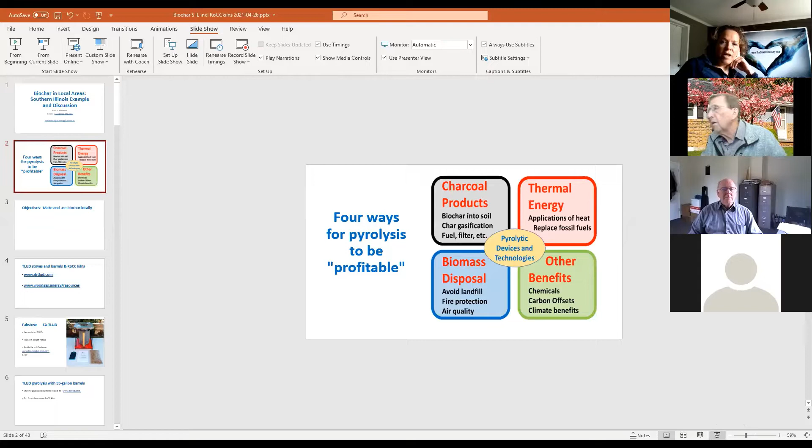Slideshow, we can see your '4 Ways to Make Pyrolysis Profitable.' Yeah, and that, okay, I'm on slide 2. That's all right, I got my controllers over here. All right, and it's filling the whole screen, correct? Yep. All right, fine.

Tentative title, as we said, this is very casual. I met Amy, what year was it, Amy, you had your conference? Well, it was 2019 in Carbondale, June 2019. June 2019, gee, it seems like longer ago than that because of COVID. But I went to Carbondale and got very enthused about the different types of things. I explained some of the stuff I was doing there. Lots of things have changed since then, so this is certainly no repetition of what I've done in the past here. There's my email address. I'll give that to you later on if you need it.

The 4 possible ways to make pyrolysis profitable. One, obviously, charcoal products - this is the biochar, but if it's the char only, it probably isn't going to make enough money to be sustainable. We'd like to use the energy, mainly thermal energy, not trying to talk about electricity all the time, which is the big buzzword. Everyone wants to do electricity, but just the thermal energy has great value.

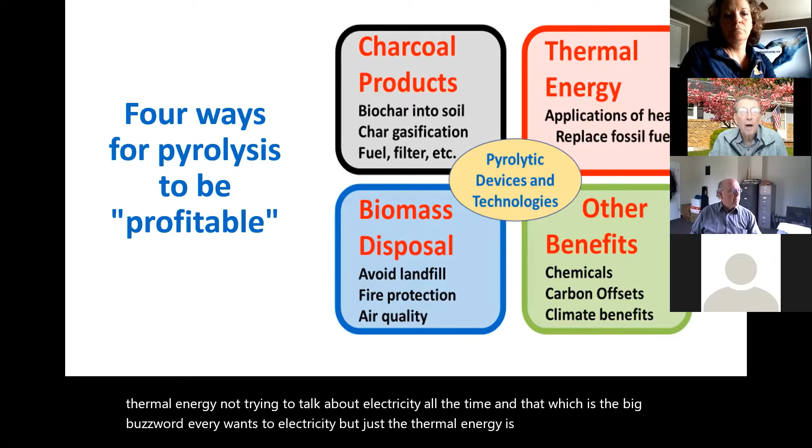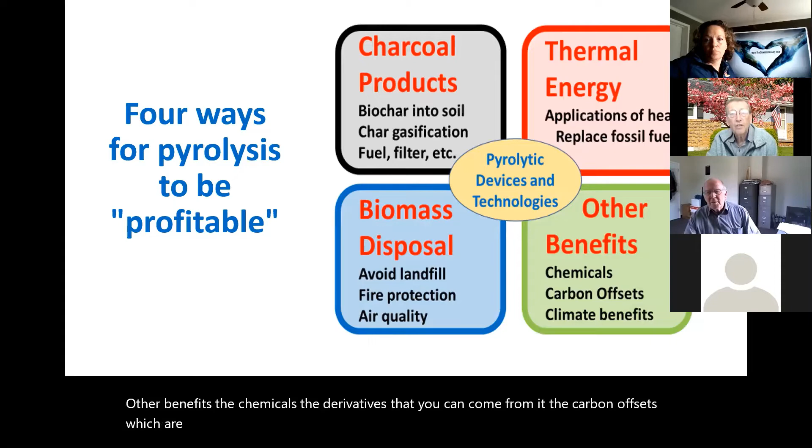Biomass disposal - out in California, they've got to get rid of the underbrush, but we've got landfill issues, air quality issues, how to do it cleanly. And the other benefits: the chemicals, the derivatives you can get from it, the carbon offsets which are marketable, and of course the climate benefits - we want to help the climate. That's actually different from the carbon offsets or carbon removal issues. So that's how I usually start off things, to put things into perspective.

We want to get 1, 2, 3, or all 4 of these working together to make something sustainable. This slide simply says objectives: to make and use biochar locally.

Amy's the driving force for Southern Illinois, and I'm about a 4-hour drive away. And actually, Joyce, you're only an hour away from me, and we'll talk about stuff. We'll probably meet fairly soon. I hope so.

One of the objectives here is whether there's going to be a nucleus, a focal group, activity centers, something in Southern Illinois, or virtually in Illinois itself. The Illinois Biochar Group exists, it functions. COVID has put the dampers on it, but I am one of the two guys that founded it, and we've had meetings in the past and look to have them again in the future. So if I can help out in the biochar way, please let me know.

I give here 2 websites. My one website is Dr. TLUD, D-R-T-L-U-D, drtlud.com. I didn't invent it, but I did name it. And this is the technology of a migratory pyrolytic front going down through the biomass.

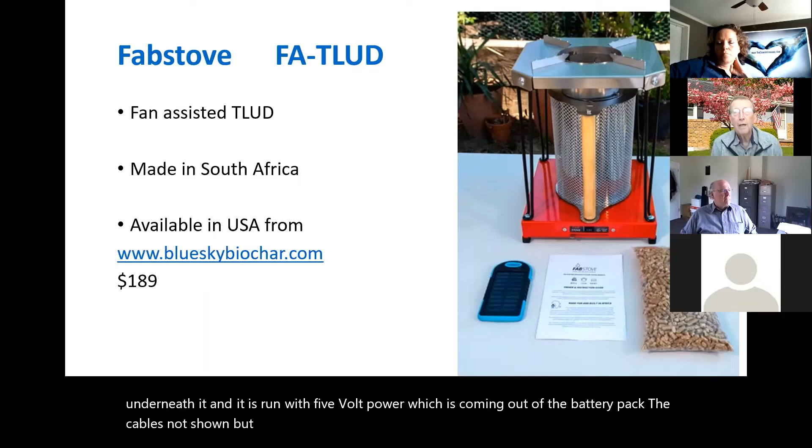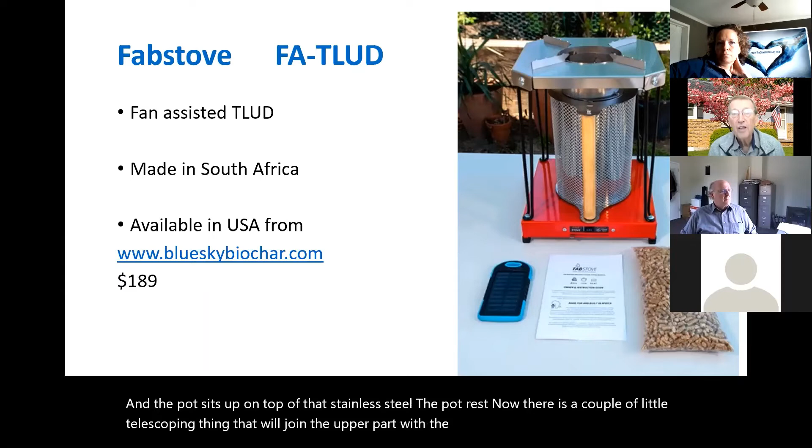In this stove, the red base has a fan underneath it, run with 5-volt power coming out of the battery pack. The cable's not shown, but it plugs in with a USB, same as for running cell phones. The pot sits up on top of the stainless steel pot rest. There's a coupler, a little telescoping thing that joins the upper part with the gasifier in the center, the silver one. It's a mesh outside, has a wooden handle, and it burns pellets inside of that.

Extremely clean - I could go on a lot about this - and it will produce very good biochar out of the pellets at a typical rate of about 20% yield. Put a kilo in and you get 200 grams out. And you can cook with it for about an hour and those types of things.

If there's interest in this as a way to make biochar, very small scale, that's fine. We can talk about it, maybe some group in Southern Illinois and all that.

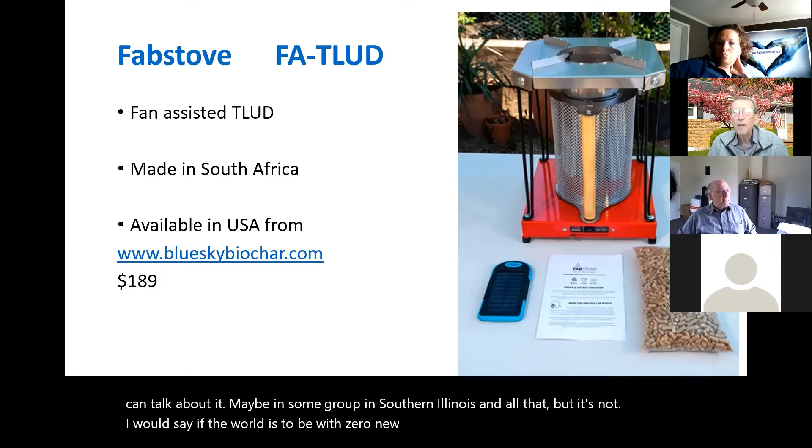If the world is to be at zero new carbon emissions by 2050, all the people that are cooking will be cooking with either biomass or electricity. There'll be some solar, but not at night. But gas, kerosene, and coal cooking will all be out. So when you can have basically a gas-burning stove that makes its own gases out of biomass, and it's very clean, this is something which we would want to have.

You use 1 watt of energy for the fan to get 1,000 watts of thermal power out of it. So it's a great device.

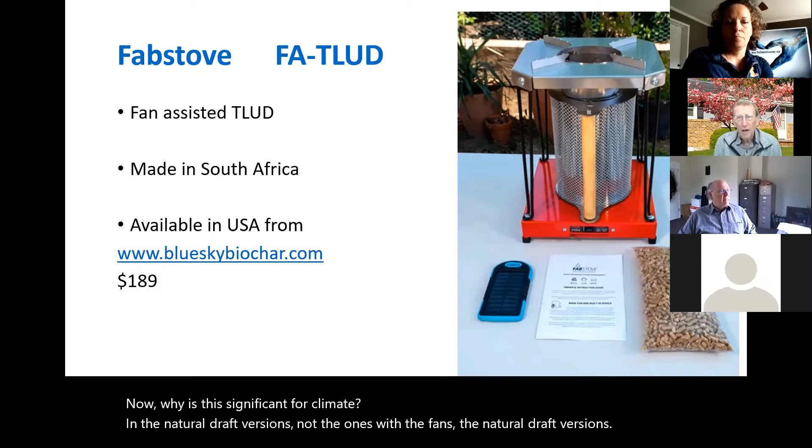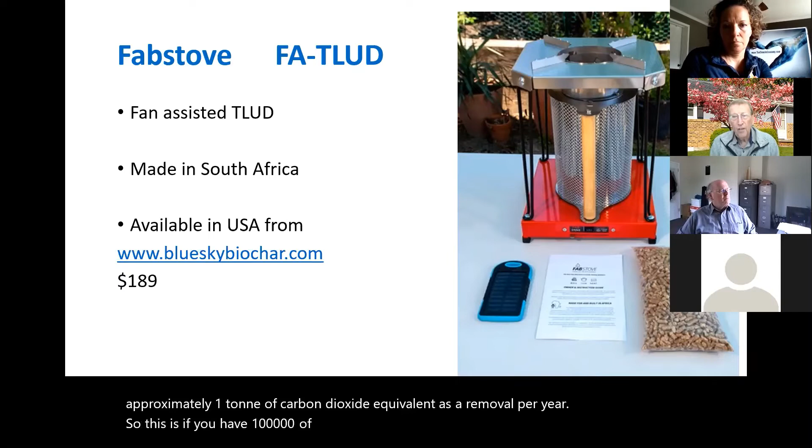Now, why is this significant for climate? In the natural draft versions, not the ones with fans, there are something like 100,000 of these units in India already, and each unit will produce approximately 1 ton of carbon dioxide equivalent removal per year. So if you have 100,000 of them, you could get 100,000 carbon dioxide removal units.

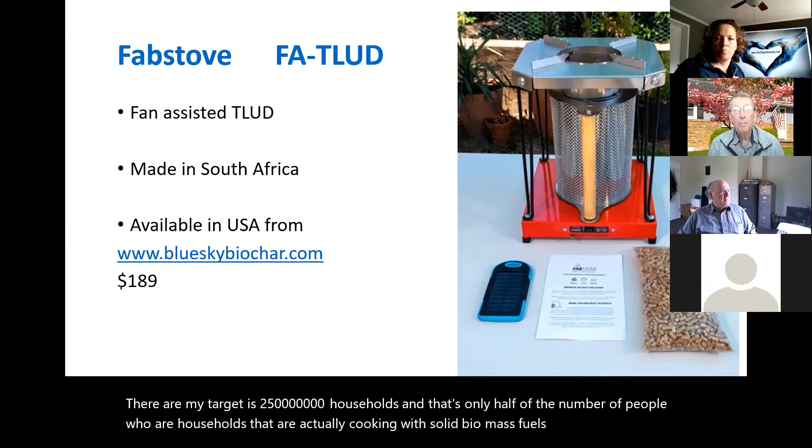What's been happening is people are cooking with the same fuel they used before, but in a sustainable way, using less of it and sequestering more carbon than most other projects can achieve. My target is 250 million households, which is only half the number of households actually cooking with solid biomass fuels today.

So it's a monstrous amount of energy and sequestration that can be accomplished. To do something in Illinois with the cooking tool would be of interest, if somebody has interest in it. But let me mention something here.

Yes, there's also at the Dr. TLUD website a number of articles and things about pyrolysis in 55-gallon barrels. I'm actually not going to focus on it because the barrels, although they do a good job, are a little bit fussy. You need to have dry biomass, and you have to pack it the right way.

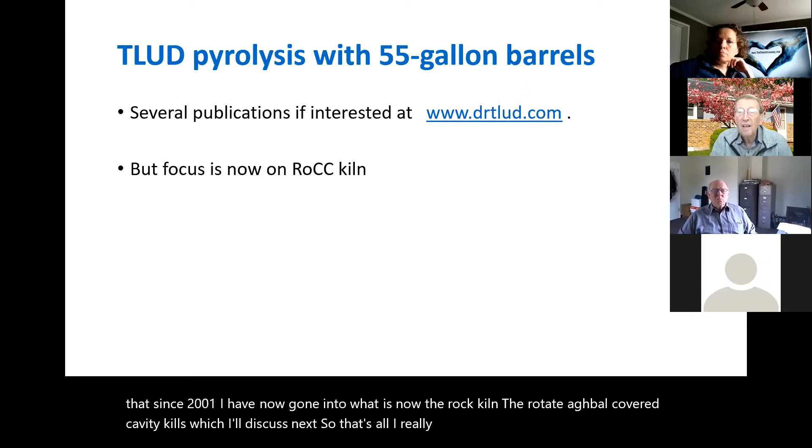After working on that since 2001, I have now gone into what is the RoCC kiln, the rotatable covered cavity kilns, which I'll discuss next. That's all I have to say about the TLUDs. If you're interested, we can follow up, especially if a few people want to get together. Certainly if we have an outing, we'll make popcorn and other things on my TLUD stoves, the Fabstoves, when we're together.

Okay, rotatable covered cavity kilns. The concept of the ROCC, R-O-C-C, is that the biomass goes into the chamber, it is pyrolyzed, gases come off, and the charcoal accumulates in the bottom.

The next slide shows the same left-hand diagram. On the lower left is the open top cavity kiln, as opposed to the covered, or at least partially covered, cavity kilns. With these cavity kilns, you throw the biomass in, there's a fire, and there is no air entering anywhere into the bottom of the chamber. Sometimes they're conical, sometimes they're troughs, you can even do it as a trench in the ground.

As the pyrolysis occurs, the biomass is converted into charcoal, and the gases come up and burn at the top. Oxygen gets to that, gives you the flame, burns it, and makes it a relatively clean burning situation. That oxygen cannot reach down below where the charcoal is collecting, so you're saving this charcoal as it goes along.

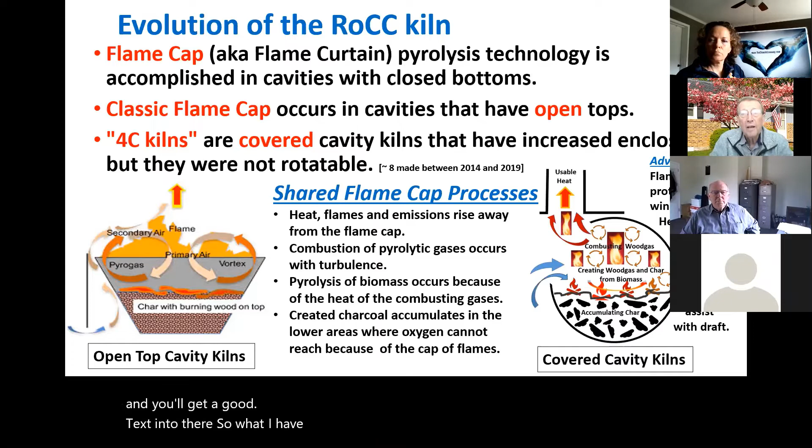So what I've done in the RoCC kiln is that the same process occurs: the char accumulates at the bottom, the gases come up, and we're burning it, but the gases come in over the lip, what they call the porthole, the opening that's there. It burns those gases and goes up to a chimney, or even without a chimney.

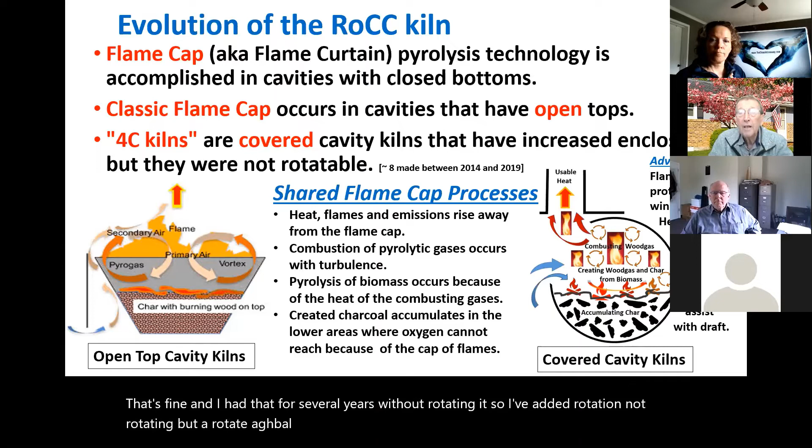I had that for several years without rotating it. So I've added a rotation, not continuous rotating, but a rotatable mechanism for mixing. The main purpose is that you're able to mix the char on occasion. Here's a picture of some of the...

...open top cavity kilns. They're more susceptible to wind variations coming into it, and there's less chance of capturing the heat from it. You certainly have to either be there and stir it to get it going, and they're pretty hot to get up close to at the end. There's a limit—you obviously can't make this thing gigantic in size, because you could never approach it to throw stuff in.

Well, yes, there's a big, gigantic size. How about this one? I didn't do this—other people have done it.

This is the half of some gigantic metal cylinder, and they're using a bobcat or something here to be able to load it and throw that stuff in. Major flames, stuff coming off from there.

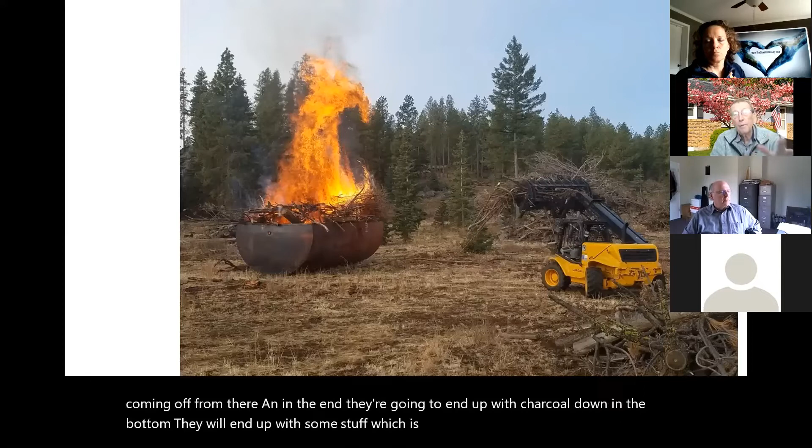In the end, they're going to end up with charcoal down in the bottom. They will end up with some stuff which is torrefied, because if it's been protected too much from the heat reaching it, they are not able to mix that and stir that.

I would say this has not caught on, because one of the things is, after you make something this big, really the only way that they even extinguish this one is they rolled it and they flipped it. And so then you're ending up with it upside down, suffocating the char that's inside.

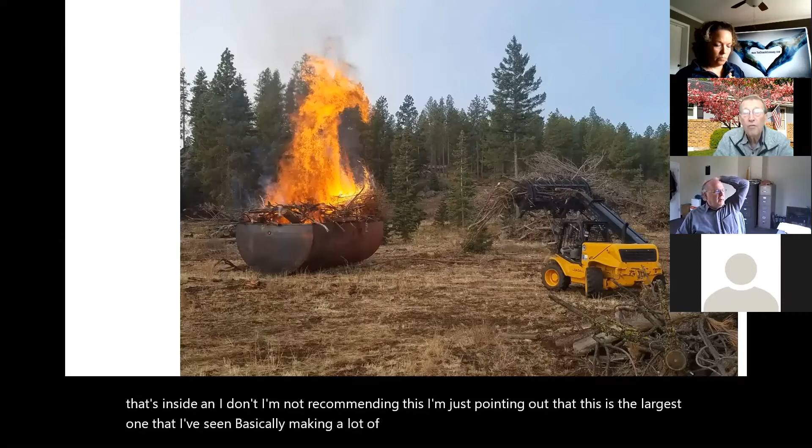I'm not recommending this. I'm just pointing out that this is the largest one that I've seen, basically making a lot of char. It's not an open fire on the ground, but it is very much an open fire.

So this is the flame cap technology, which is used in the RoCC kilns, except that the RoCC kilns are partially covered and rotatable.

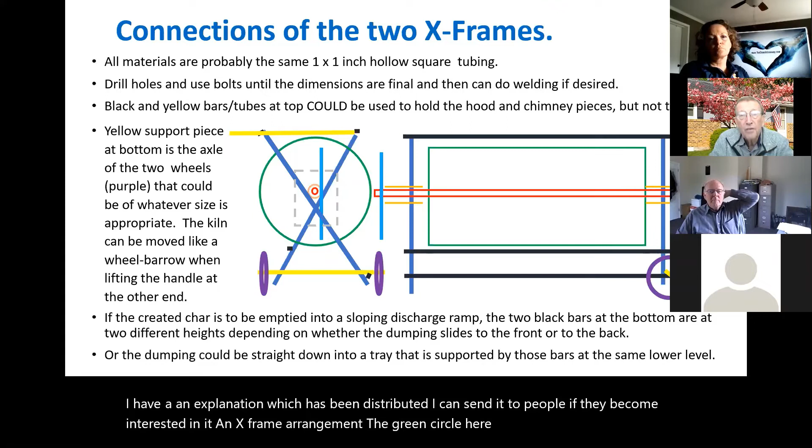An X-frame arrangement. The green circle here is the rectangle that's visible here from the side view, is the barrel, a 55-gallon drum. I'll show you some pictures in just a minute of it.

It has a pipe that goes through the center. It could be all the way through, or it could be just axle stubs at the end. You don't have to have the pipe go all the way through. I've done it both ways.

Handle on it to be able to turn this, and it will then pivot on a rudimentary axle, and they're not even bearings needed. It's just a pipe within a pipe, and we put wheels on it. You can pick it up and wheel this thing around, and again, you'll see some pictures of it.

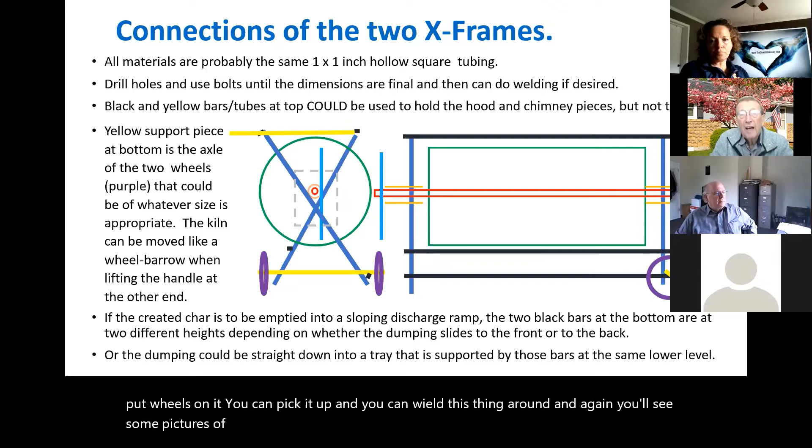This X-frame design is one of several. You'll see some other ones here.

Typically, now this is a barrel with a 55-gallon drum. The opening here straight across is 12 inches. It's 13 inches measured on the curve. This only has stub axles on the end of it, and it gives the dimensions.

In the RoCC kiln design, the chimney or hood is represented up above into here, and you can have where the emissions are coming in and out and going up to the chimney there.

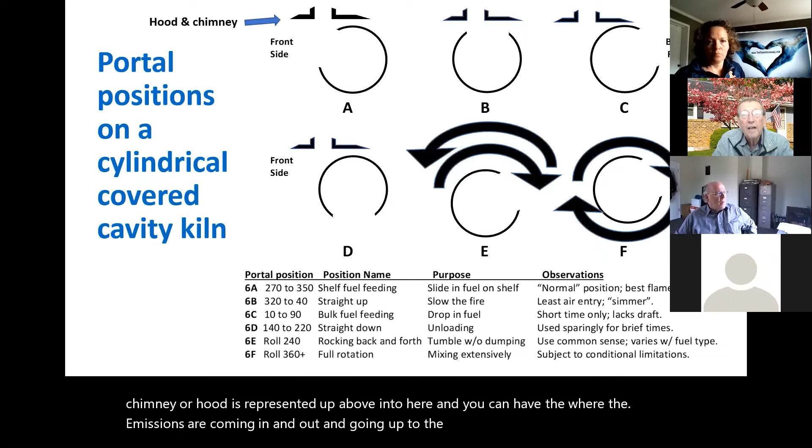You can rotate it upwards, and this actually limits the air going in. So it's a way of calming your fire to keep it from getting out of control. The air, it will actually, you can almost put it out in there.

Rotating it, the hood stays in a fixed position, rotated to the rear side. Now you even have a more clear shot at throwing in fuel into it.

The A, B, C, and then D for dump, didn't just nicely turn out that way, or down, is to empty it. And so the char will then fall out and you collect it into there.

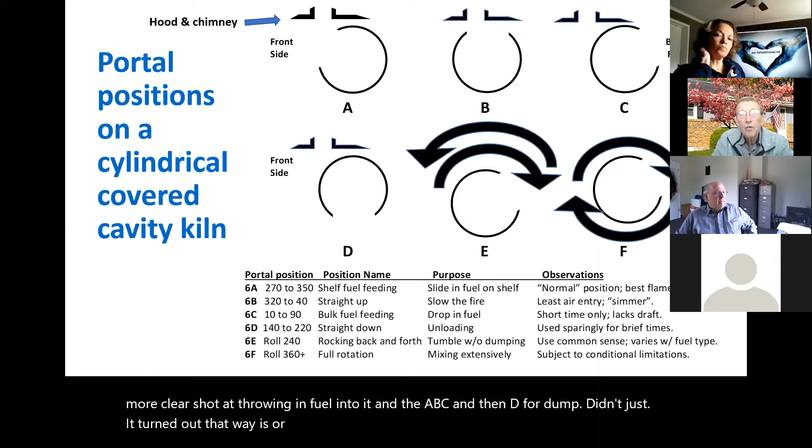So these are the positions of the cylindrical covered cavity kilns, which can be rocked back and forth, or it can be actually totally rotated all the way around if you put a little door or some bars on it, which I can discuss.

Some of the sizes. What you're seeing here, these two on the right-hand side are about 38-inch diameter. This was made in India, and it's just a little bit bigger, because of the photographs with scale, you can't tell. These other ones here that I'll be showing you are in 55-gallon drums, which are 23 inches, a 2-foot diameter. So it's sort of a 2-foot diameter versus a 3-foot diameter. I'll show you a 4 and a 6 in just a minute here.

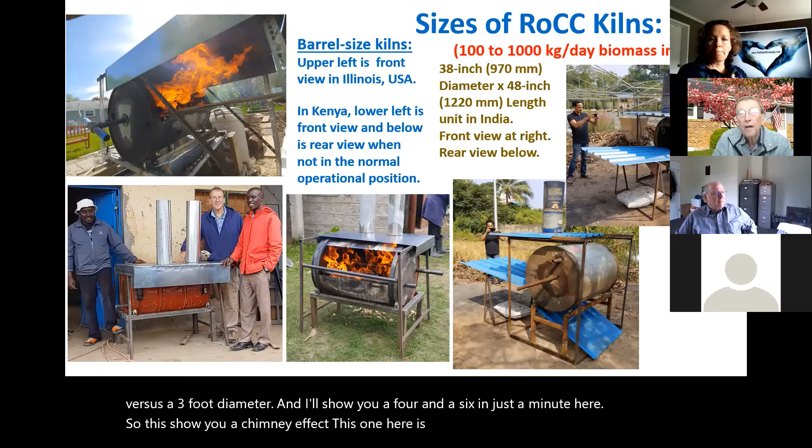So these show you a chimney effect. This one here is simply a sheet of corrugated metal with one chimney rising up from it. And you see it also down in this picture into here. We're feeding in the fuel from one side. The fuel gets dumped and comes out a chute to get it away, or it can dump it straight down.

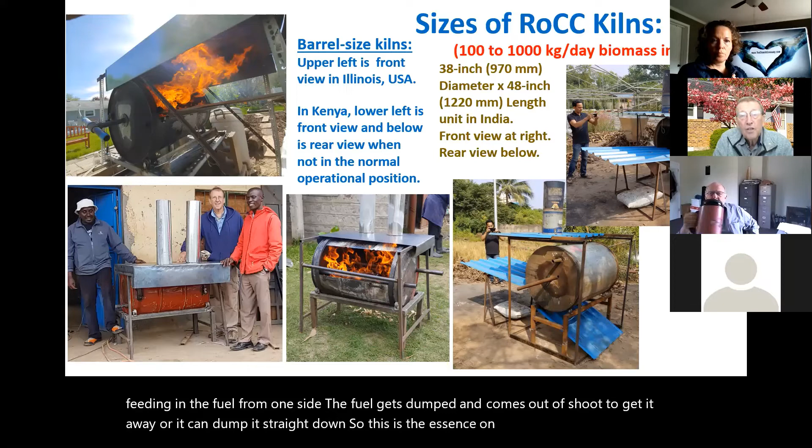So this is the essence on it. These units here, you are seeing, I'll point it out in this, you see my cursor there?

I'm moving it, is that visible? Can you see the cursor on the middle picture at the bottom? No, I don't see it. Oh, I think I'm pointing at this stuff and can't point. Wait, I need to go into this one over here. Now you can see it there, right? Yeah. Okay, now I turn this way - now I'm looking at my other screen, so now you can see it.

Okay, this has a frame with 4 wheels on it. You can see the wheels over here, and this barrel rolls on the wheels - it does not rotate on an axle. So we have the rack with rollers, and we have the axle as ways that we're able to do it.

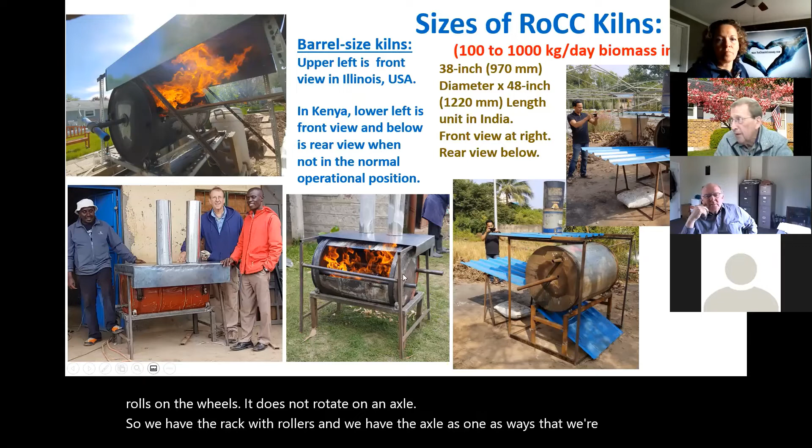All of those shown in these pictures are that way. This comes out of a different slide presentation I've done regarding searching for sizes and things. Up in here, these are the cook stove types of things we're dealing with. And there's the big ones down below, the big units where you can pay $250,000 or 100,000 or multiple millions to get a pyrolytic device that's going to maybe also make electricity and the rest of it.

What's been missing is stuff in the midi and medium scale, in order to produce what I classify in 10 hours of operation - an extended, good work day - you're going to get 100 kgs up to 1 ton of finished biochar coming out of it.

These are all in orders of magnitude. Medium would be 1 ton up to 10 tons, and then you go larger from there. No, I'm sorry, I misspoke - this is on the input of the biomass. If you're putting in 1 ton of biomass, you would expect to get out 200 kilos, a 20% yield of biochar. Typically, a 20% yield is what we're looking for.

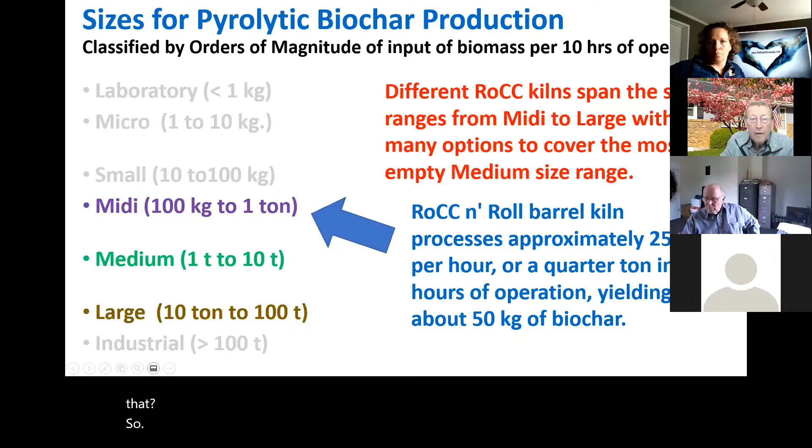Okay, so now some of the units done in Kenya. This is with that X-frame that was mentioned earlier, showing into there. And this was made out of a barrel, and pretty much most of the rest of it was scrap.

So when people are saying, hey, can they afford to make it - if you went and bought new material at Menards, or Home Depot, it's not going to cost very much. But they found stuff in the local yard, some straight bar - this is like a 1 by 1 inch hollow tubing. This handle here was the arm off of a chair that they found.

And then they since put on another arm down below, so they have 2 of them in there, and it pivots. They did some welding, put it together, and made this frame so it would work, and then they've got that set up. The first time you use one of these, you're definitely doing it just to burn off the paint, burn out any contents in it - stay away from the emissions and stuff.

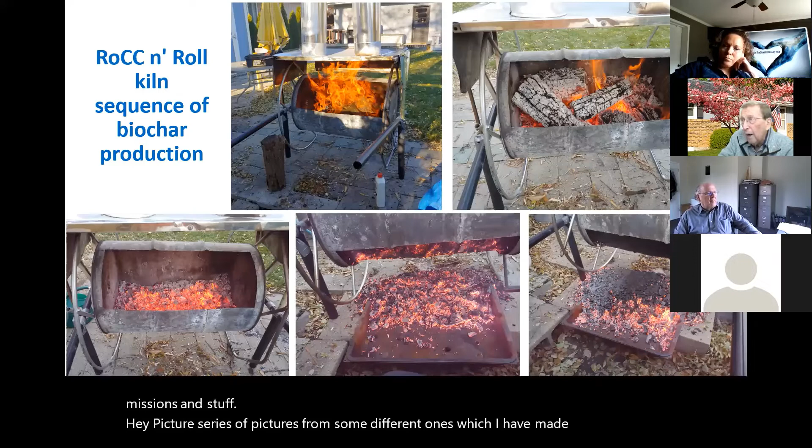A series of pictures from some different operations, this is one operation but several pictures of it. It's flaming away into here, going up pretty much through the chimney. Yes, it can be smoky if you're not careful, and if your fuel is wet, you want to be alert to that. You can see I put some fairly big chunks of wood into it, and they were pyrolyzing. This event was about maybe 2.5, maybe 3 hours for these pieces, and they're all pretty well disappeared.

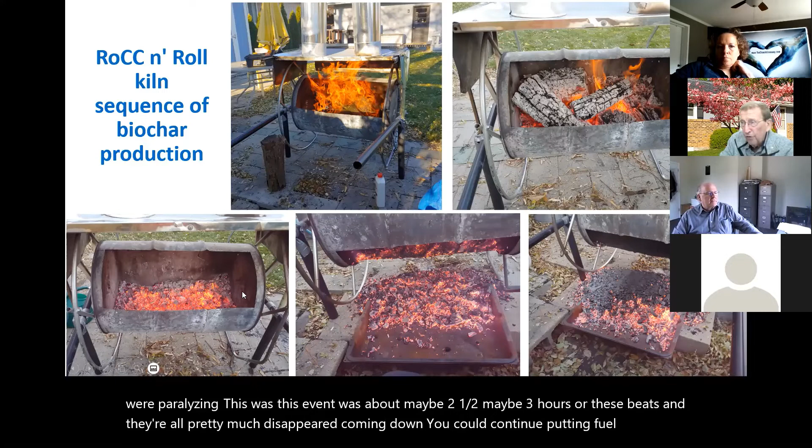Coming down, you could continue putting fuel into there until you filled up halfway full with your char. You don't really think of going much more than halfway full, but you can keep putting in the material and rotating it to mix it up until it's pretty well full. Then here I'm dumping it out onto a catch pan and the stuff that comes along with it. So it works.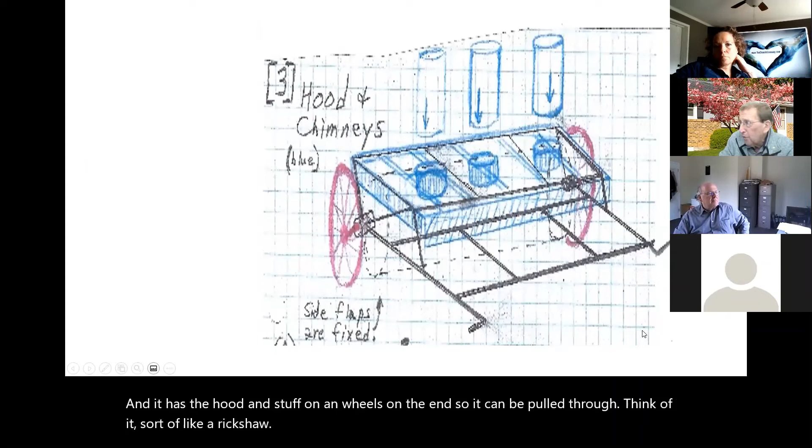Think of it sort of like a rickshaw, and you can pull it through and just keep throwing your fuel up into the part and then rotating it. So I've got that type of thing.

This is the example that I built at home. It works. It has its design limitations that I'm still working with.

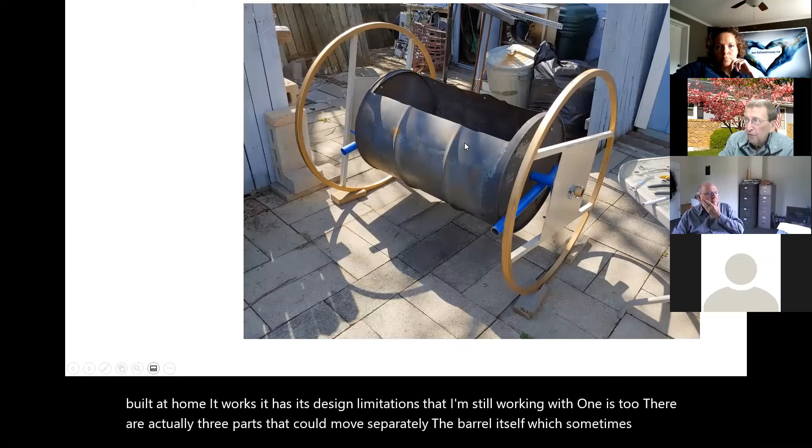One is there are actually three parts that could move separately: the barrel itself, which sometimes you want fixed position, sometimes you want to turn it by itself. The blue bars here are on upside down - these are what hold up the hood when turned the other way, and the hood arrangement is supported up above it, and you don't want that to spin around on you.

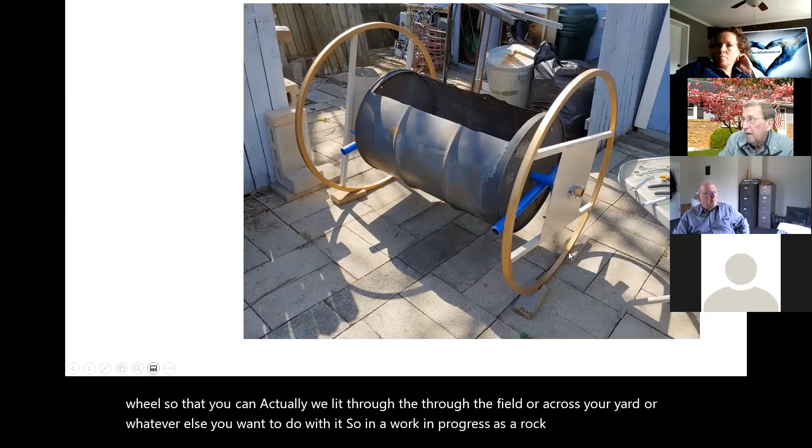And then finally, there's the outside wheel so you can actually wheel it through the field or across your yard or whatever else you want to do with it. So it's a work in progress as a rock kiln that's designed to roll - longitudinally, I guess, whereas the other one had the wheels crosswise on it, more like a wheelbarrow.

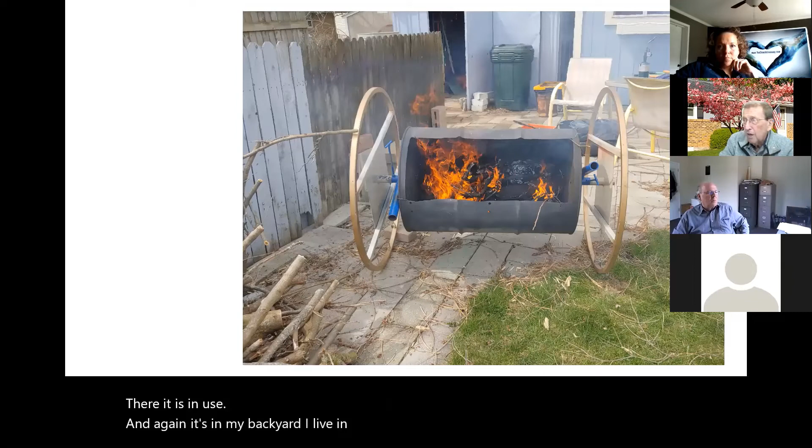Okay, so go to next. There it is in use, again in my backyard. I live in a typical residential situation in an Illinois suburb, so I've never had the fire department come on to me for any problems. I haven't had neighbors complain, although I have to admit, I've had a few smoke incidents, which you can't leave unattended, of course.

This is an experiment from, I think, two days ago. One of my predecessor units was the heat source, and I put the rotatable barrel up above as a dryer. One of the big issues is how can I get my fuel to be dried more than it is normally and dry it faster, then dump it into the other unit down below. This is just rigged together with some concrete blocks and stuff.

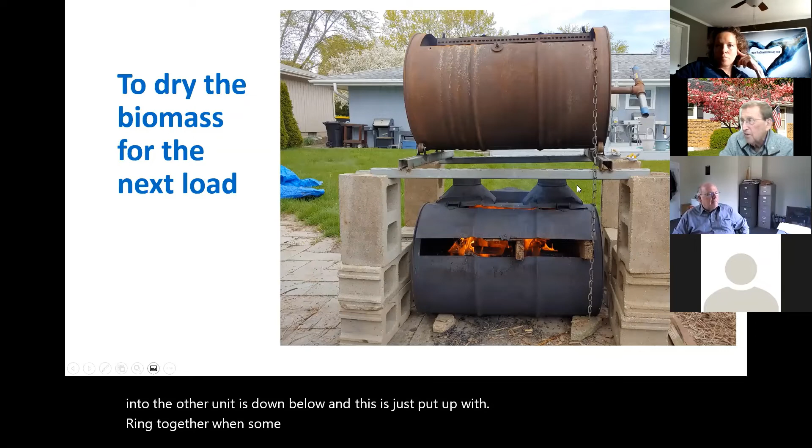This is definitely a work in progress. But you're able to dry it - it did not transfer the heat nearly as much as I thought it would. The idea is if you actually had the lid over this top part, it becomes a retort, and you'd have to have a hole in it, obviously, for gases, moisture and stuff to come out. And you could make a retort type of char.

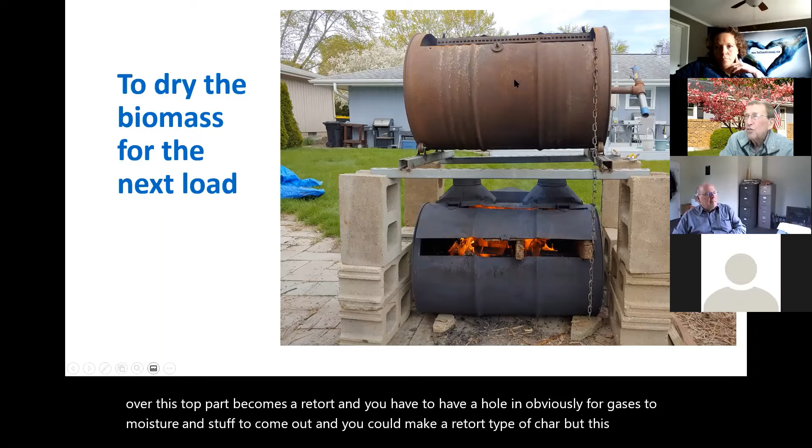But retort chars tend to be lower temperatures than if you're doing it with the flame cap, because the flame cap has flame present - it gets much, much hotter in there. Work in progress. Again, I say that so you all know that you're invited to participate in the progress, okay?

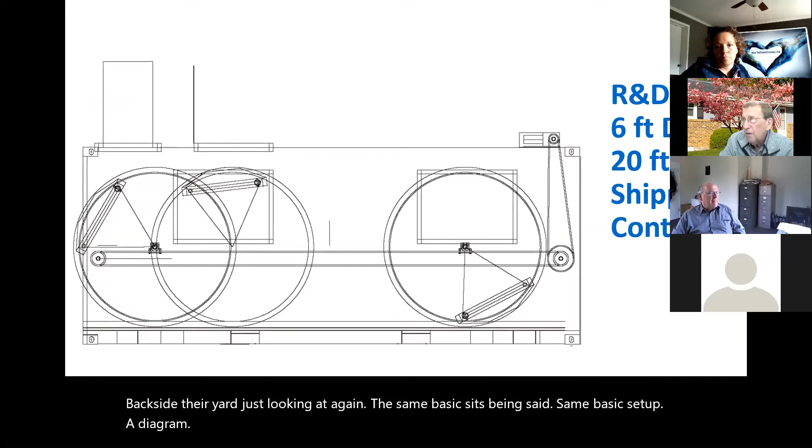Backside there, the yard, just looking at the same basic setup. A diagram for a 6-foot diameter cylinder, so I could stand up, any of us could, unless somebody in the group is really tall - you can literally stand up inside that cylinder. And it's inside of a 20-foot shipping container, and here it rolls on a rail, on 2 rails in the bottom.

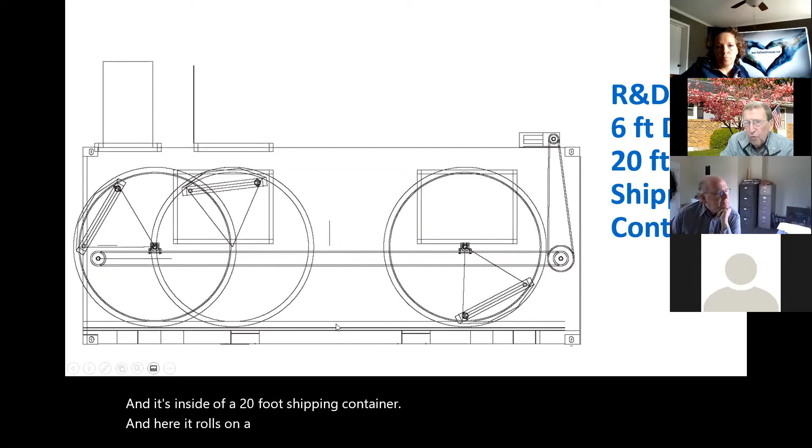It is not rotating on the central pivot, and it is not rotating on rollers in one spot. It actually rolls inside of this container. So this unit now - next picture.

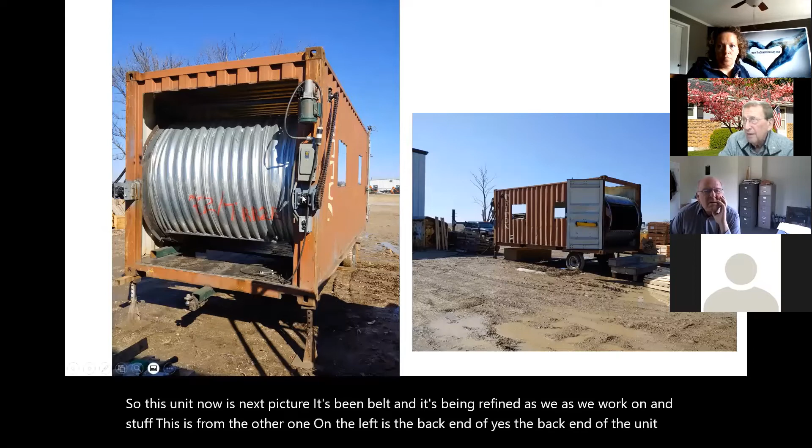It's been built and it's being refined as we work on it. This is from the one on the left, the back end of the unit. You see the power drive - this is electrical driven, it's got a motor into it to rotate this drum.

The picture on the right here is a 20-foot shipping container. This is the fuel receiving end. The other picture on the left is where it's ready to dump the char down through the hole that's in there. There's a couple more pictures coming.

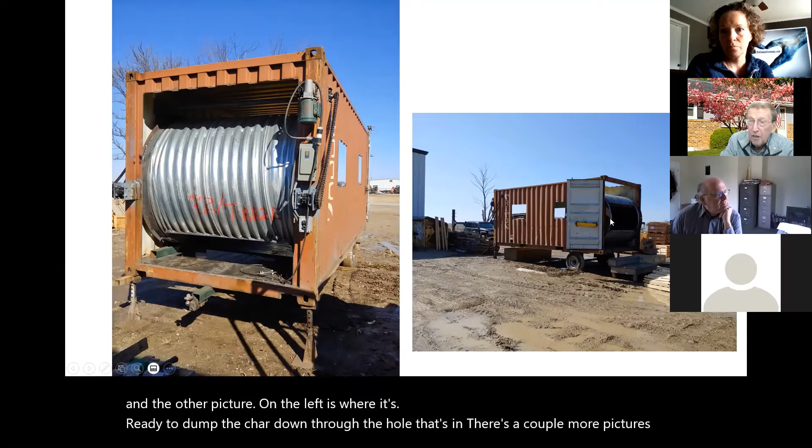It takes a lot of fuel going into it, burns it very nicely. Here's the flames coming through. We have not put any chimneys up above on it. We're working on mechanisms for how to load it, and there's conveyor belts and things like that.

You don't think you're going to operate this thing with manual labor in Illinois. You might have something large like this in an overseas country where labor is very, very cheap, but this produces a great deal of heat and a great deal of char.

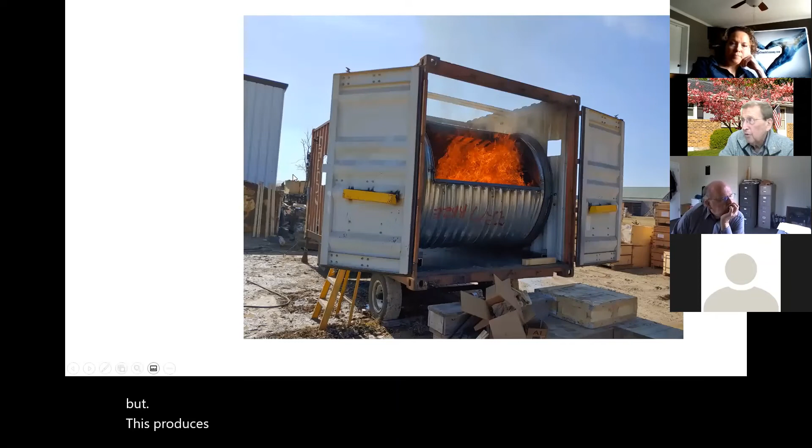As in my first slide, if you can use the heat, the char is free. If you can sell your char for enough, the heat's free - whatever you want to do with it, those types of things. So here's some more pictures, the one on the left is at the receiving end where fuel is being put into it.

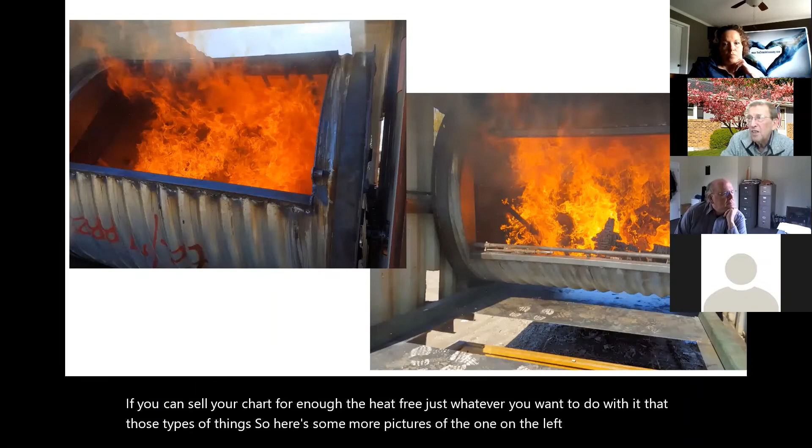You see that there's no flame on the lower lip here. The flame is going underneath this upper lip and then into the places where the chimneys would be up above.

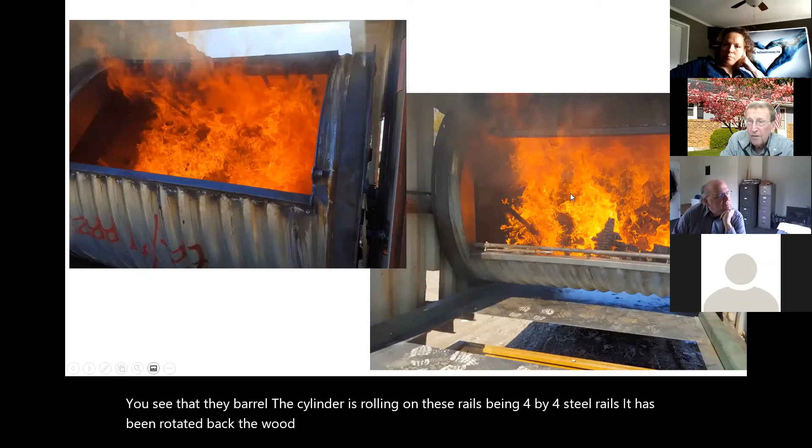In the photo on the right-hand side, you see that the cylinder is rolling on these big 4x4 steel rails. It has been rotated back. The wood falls inside of there, falls over on top of itself, breaks itself up, continues to roll, and it will actually dump it down through this hole into a container that we have underneath it.

Okay, is this a finished product? By no means. Is it a proof of concept and how things work? Yes, and it definitely could be something of substantial interest. And I'm not saying that it needs to be in the container.

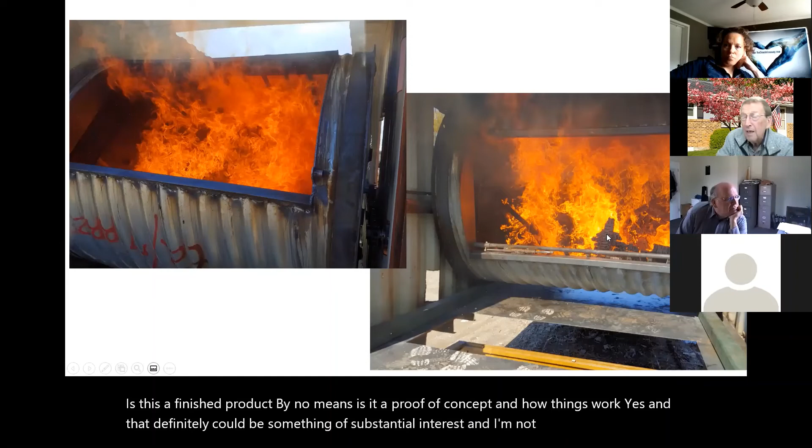The container limits it to a 6-foot width of that cylinder. But we can rotate this cylinder the other way and put it either on the rollers or on the central axis for rotation that way.

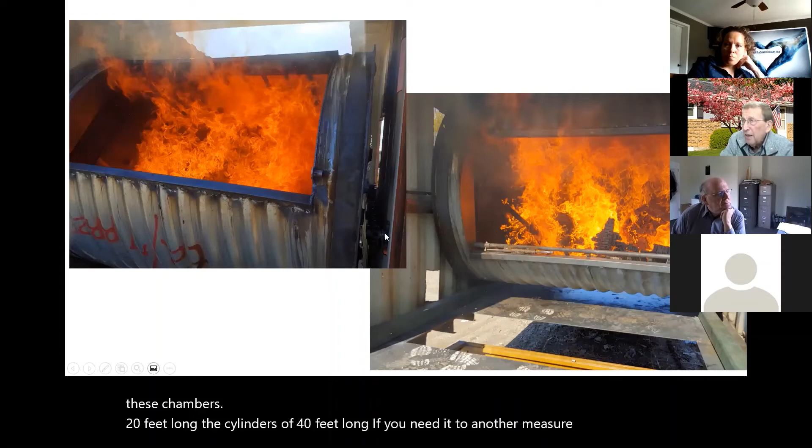Similar thing, and I want to be able - we can make these chambers 20 feet long, the cylinders, 40 feet long if you needed to, and I don't imagine that happening. You see that this is corrugated steel.

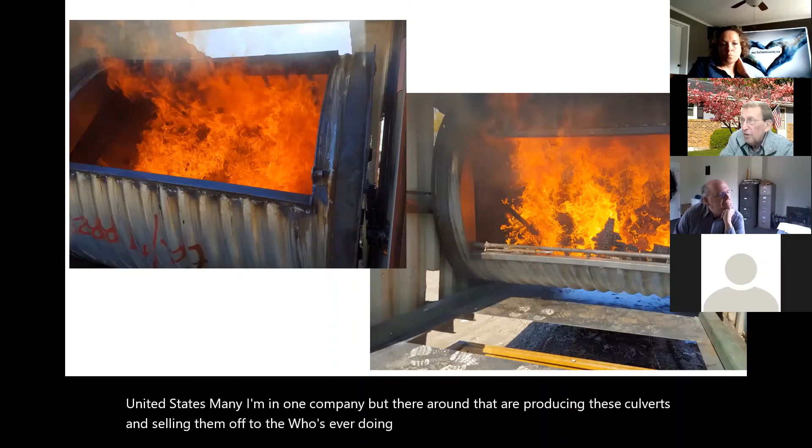This is what they use for culverts in North America. There's 30 different factories around the United States, many of them in one company, producing these culverts and selling them off to whoever's doing highway work in other places. And you can get them, I think, up to a 16-foot diameter, maybe even an 18-foot.

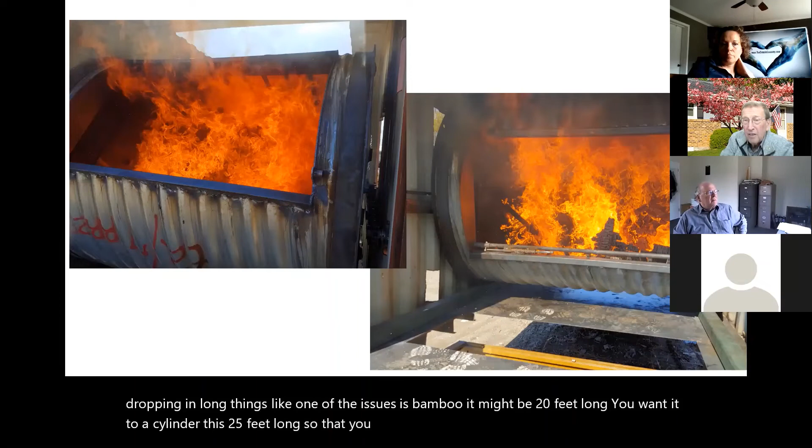I mean, it's gigantic, and you can have it 20 feet long. You're going to be loading this thing with forklifts and dropping in long things, like one of the issues is bamboo that might be 20 feet long. You want a cylinder that's 25 feet long so that you just hit that hole nice and easy and it goes right in, feeding massive amounts into there. So these are, again, the options and things for such developments.

Here is at the working end before it's been - this is the size of the wood we've been throwing in, a lot of these are 4x4s, and it comes out as a nice biochar. This is from a waste recycling facility, which is here.

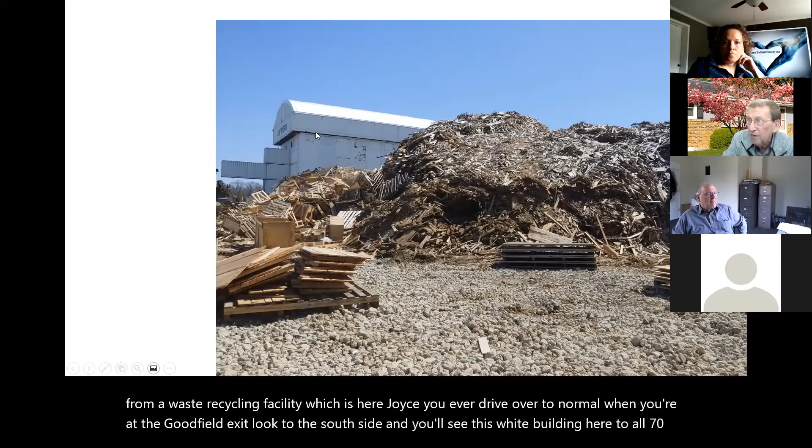Joyce, if you ever drive over to Normal, at the Goodfield exit, look to the south side and you'll see this tall white building, 60-70 feet tall, for Chip Energy. Here's the pile of waste wood — they pay Chip Energy to receive this wood so that it doesn't go to landfills.

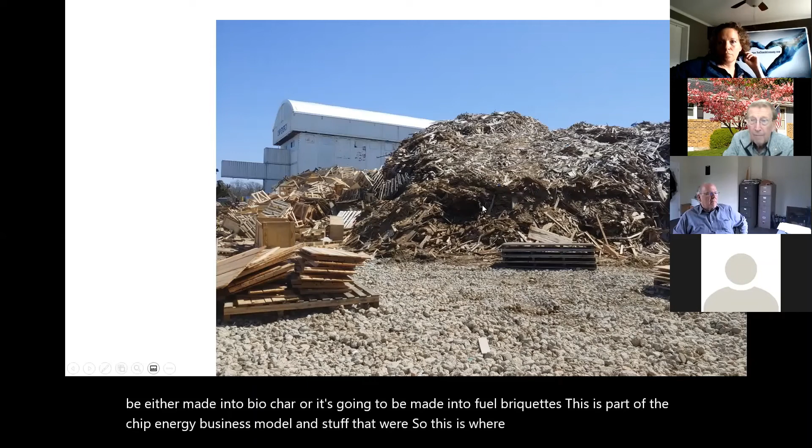It represents thousands and thousands of tons of biomass that has not gone to landfill and is going to be made into either biochar or fuel briquettes. This is part of the Chip Energy business model, and this is where I get these units built. Paul Weaver, a friend of mine, I'm involved in the business arrangement also with Chip Energy, and we are able to work with biomass and the various issues involved.

So that's all the slides which I specifically designed to put out. Although we can go back to some of them, we can add other questions and things about it. Let me check my time here. Yes, we'll keep it going. We want to talk about some of the options.

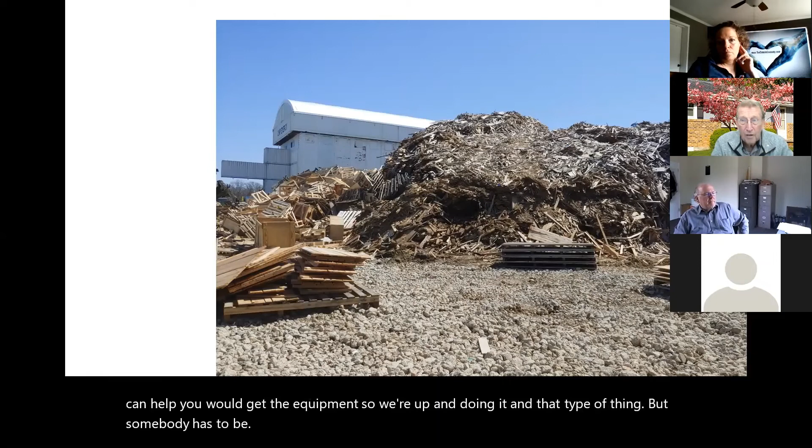My question is, if people are wanting to do a project in Illinois, central and southern Illinois, or out in the state of Washington with Brian, I can help you get the equipment so we're up and doing it. But somebody has to be operating it, running it, using the char, marketing the char.

I also can deal with when char is produced — I have a way, with blockchain, of documenting the processing of it so there can be trustworthiness and confidence that it is a true sequestration. And true sequestration is now being marketed — Microsoft has bought some at $80 to $120 a ton of CO2 equivalent.

I want to conclude with one thing. If you're going to do something about biochar, I calculated from a sample I have here that you can get about 33 kilograms — about 75 pounds — of biochar into a 55-gallon drum. You have to think about how much you're going to get out. This is bone dry, no moisture at all. And 5 barrelfuls is a cubic meter, 4 barrelfuls is a cubic yard.

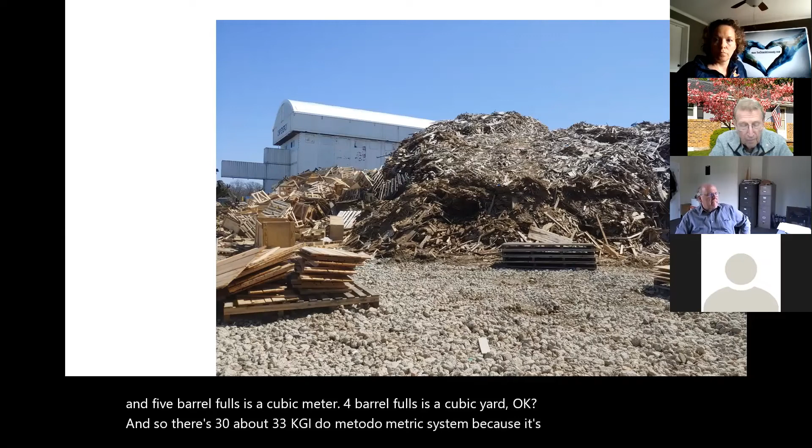So there's about 33 kg. I use the metric system because CO2 equivalents are easier to calculate. If you have 33 kg of biochar in a barrel, 10 barrels gives you 2 cubic meters, or 330 kilograms, and 330 kilograms, with the transfers and allowances, is going to give you approximately 1 ton of carbon dioxide equivalent.

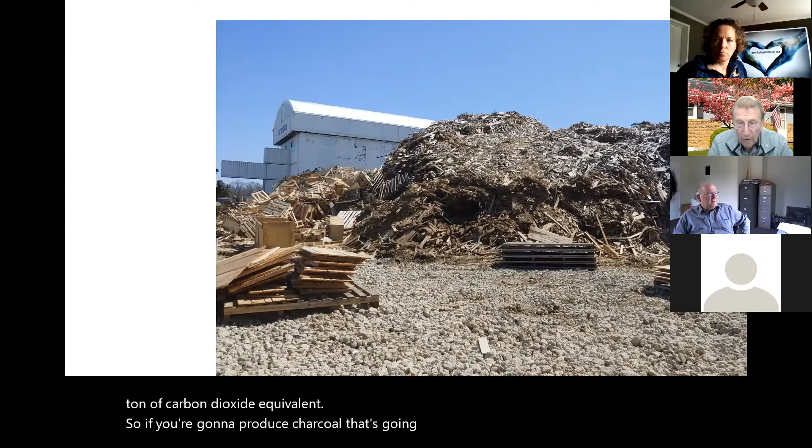So if you want 1 ton of it, Microsoft says they'll buy it for $100 if it's truly sequestered. You don't even have to give them the char — you just have to prove it's been sequestered. Someone else can still buy the char, or you use it in your gardens and everything else. But you need about 10 barrelfuls for that.

So if you're doing it in small bucket or cup amounts, it takes quite a while to get to an amount that's, I don't want to say fully measurable, but appreciable.

So I better let some comments come in — I'd like people to chip in with some quick comments, whether it was boring or exactly what you wanted, something. I'm hoping somebody's going to say, yes, let's do something in our local areas and figure out how to make it happen. Thank you. And Amy, you'll moderate this so I can take a breath.

Yes, thank you, Paul. We've had some questions roll in, and it's 12:54, so I'm going to run this about 5 minutes after the hour for everybody that has to go, since I know some people will need to leave at that point — but if you can stay, we'll continue after that as well. I wanted to address a couple of questions from Hillary. She's got two questions: is there any solution to address the smell?

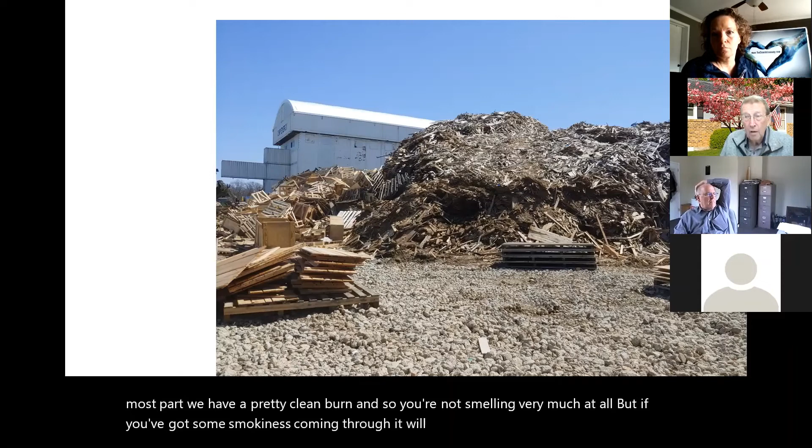What about the smoke? For the most part, we have a pretty clean burn, so you're not smelling very much at all. But if you've got some smokiness coming through, it will smell like smoke. The char itself doesn't smell - it will actually absorb odors and things. You put that into manure and make your barnyard smell better.

Have a tested business model? Say again, do you have a tested business model? I welcome all of you to participate. Exactly, that's what we're working on, right?

So what's the cost of that system - let's say that 10-barrel one? Let's see, maybe Hillary do you want to jump in - sorry, I was typing fast. So what's the cost, let's say, of that system, like the 10 barrels to produce the 330 kilograms or the 1 ton of CO2? What's the cost just for that particular system?

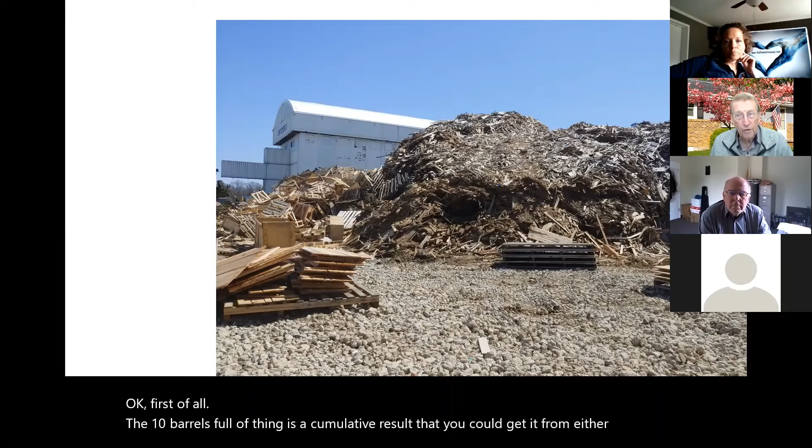First of all, the 10 barrels full is a cumulative result you could get from using that little cook stove enough times, or the barrel size, or the giant 6-footer - they all change into that. The barrel size one, with some scrap material and a welding friend, you can get one together for a few hundred dollars. The larger units, the one at the very first, there was the 4-foot unit. We're talking prototypes - $6,000, $8,000, $12,000.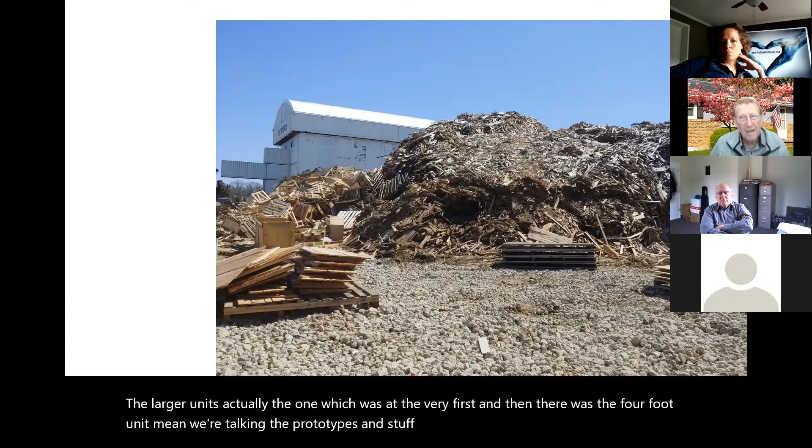The one in the shipping container - I'm welcoming any investors - is costing a bit of money. So I don't know, do you want to make it yourself, or how do you want to approach it?

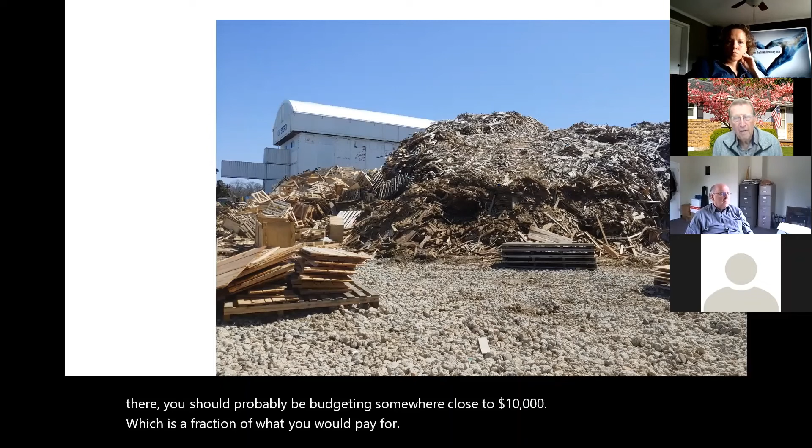What's a bit of money? I want to get an idea of the capital expense for this, so we can project what the revenue would be. If you want to make a unit of substantial size, 4-foot, 6-foot diameter, you should probably be budgeting close to $10,000, which is a fraction of what you'd pay if you're going to have continual rotations and other types of stuff.

Okay, we have another question. What are the gases emitted?

If it's burning cleanly, it's CO2 and water vapor, okay? If it is not, you're going to end up with some smokiness, some particulates, and you get some carbon monoxide in it, but most of it is CO2.

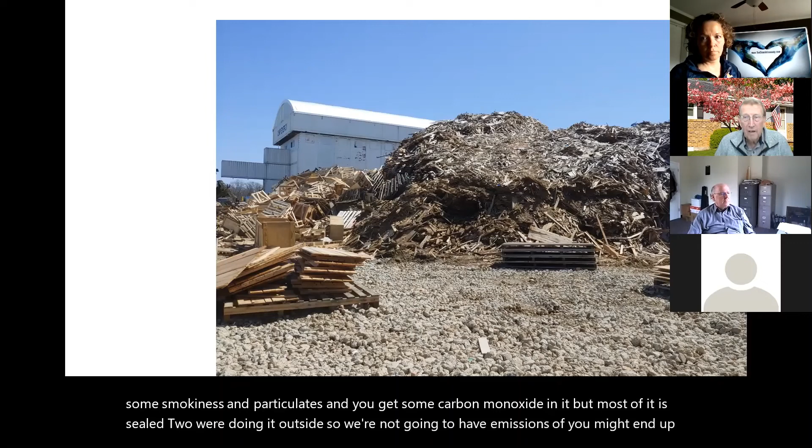We're doing it outside, so we're not going to have emissions issues - you might end up smelling smoky, but you're not going to get carbon monoxide poisoning from being in the smokiness. If that were the case, we wouldn't be sitting around campfires.

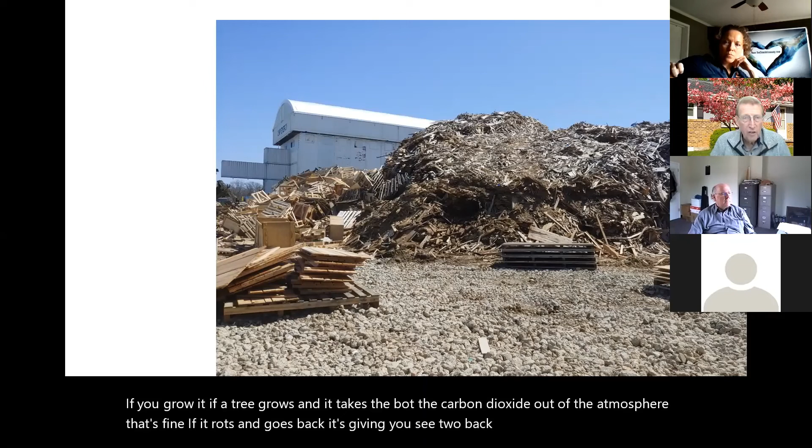But the idea here is that we're reducing carbon dioxide emissions through this process - we're sequestering it. If a tree grows and takes carbon dioxide out of the atmosphere, that's fine. If it rots and goes back, it's giving you CO2 back - it's carbon neutral. If it decomposes the wrong way, you can get methane, which is even more damaging to the system.

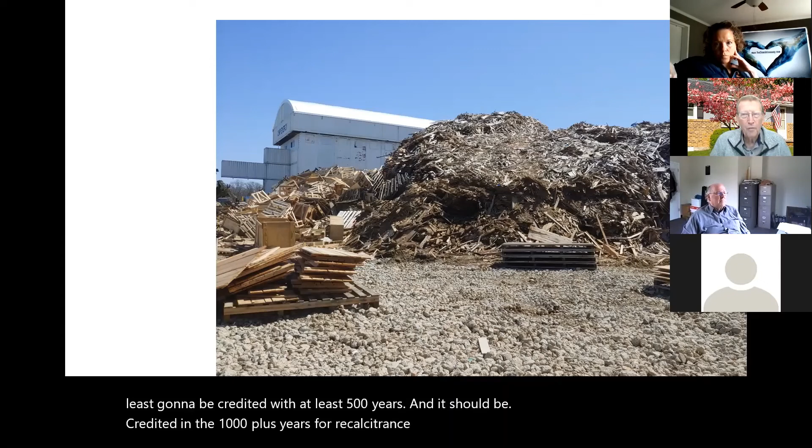So if you pyrolyze and put 50% of the carbon atoms back into the atmosphere, that's a carbon dioxide emission, but you've still kept 50% of the carbon atoms in the form of biochar, which has long-term sequestration of at least 500 years, and should be credited 1,000+ years for recalcitrance, for being a permanent removal. So yes, it's carbon negative because in the net result, the charcoal represents carbon dioxide removed.

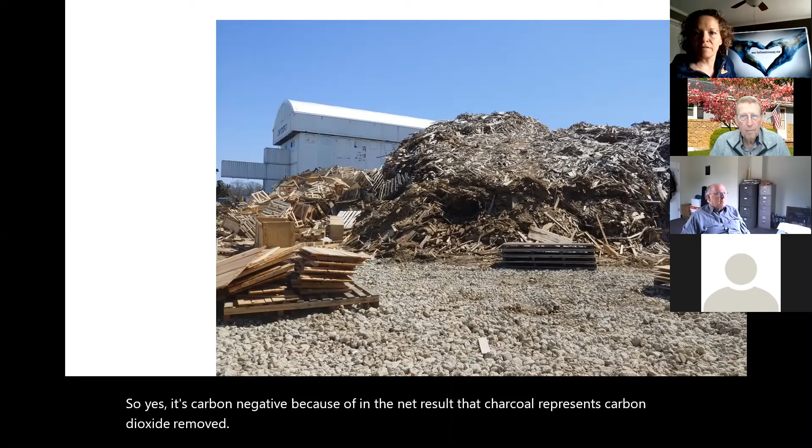When we're talking about these types of situations, we understand we have to plan them out ahead of time and calculate these things, making sure they're going to be producing in a beneficial way and not actually causing more problems than the benefits they provide.

So in any sort of situation like that, we're going to have to be considering how we're doing it, what sort of feedstock we're using, and how hot, and what we want to produce, and all these things. So it's always like a process, I would say, to design it the best possible way.

Would that be safe to say that? If somebody is going out and cutting down healthy, good trees just to make wood that they're then going to pyrolyze, for the length of time it takes to regrow those trees, it's carbon positive, which is the bad way. But if you've got dead trees in your woodlots, if you're using corn stover or surplus biomass off of fields, you're carbon negative. So you have to be mindful of the situation.

Tim Michaels is asking, how can this be used in treating the organic fraction of municipal separated solid waste? I like the question, Tim.

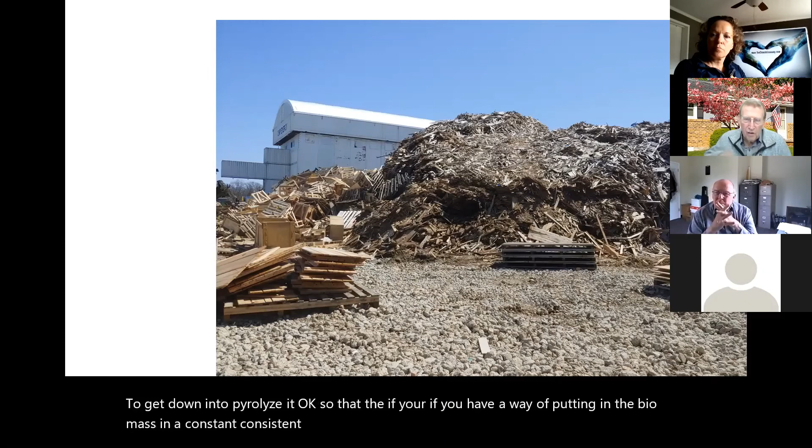Part of the issue is that it needs to be dry before it goes in there. The second is that this design does not work well if it's fine particle, it compacts in on itself, and it doesn't allow the heat to get down in and pyrolyze it. So if you have a way of putting in the biomass in a constant, consistent, fluffy way, and just spreading it in there, and the oxygen's there, and it's burning, it's almost like a fluidized bed, almost like fast pyrolysis. It isn't fast pyrolysis, but it's in that nature.

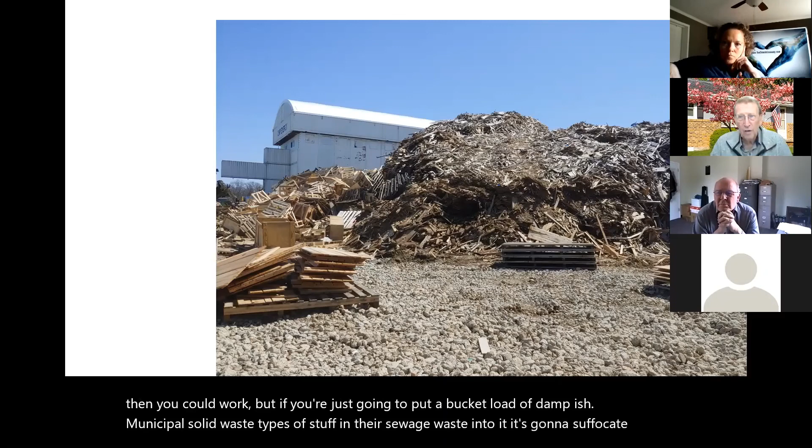Then it could work. But if you're just going to put a bucket load of dampish municipal solid waste types of stuff, sewage waste, into it, it's going to suffocate itself, and it doesn't work. So if the solid waste is pelletized and becomes a fuel, you can actually cook your dinner on it, like in that little stove that I did. But that's extra money that goes into it. So I hope that answered it.

I'm not too sure, maybe a further question? Well, to follow up, what about things like plastics? What are the reservations you might have about introducing olefins and stuff like that into the process? For what I am working on, I stay away from plastics 100%. They are nasty stuff when they burn. They don't burn the same way as the others. The products that come off of them are tricky things.

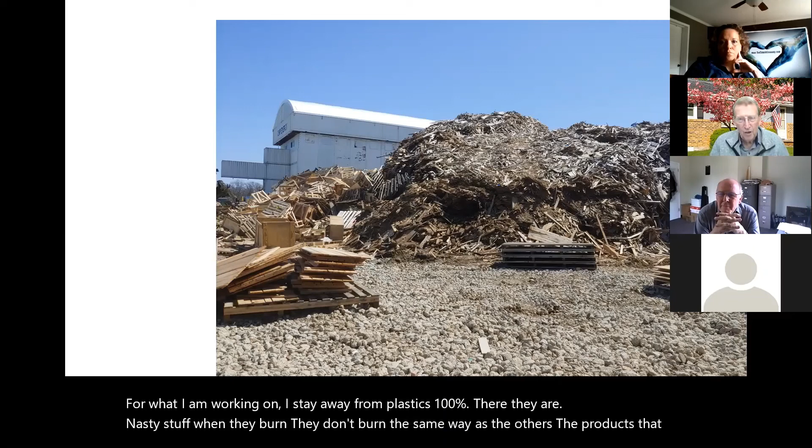So no, this system is built for a biomass type of thing.

Well, back in the 90s, I was working with a tribe in Arizona with the concept of trying to dispose of tires. And a company up in Wisconsin, Kutrib, had water chambers on both ends of the system, and they could feed whole tires in there, and they would pyrolyze them, and recover the oils and use the gases to heat the system. And they came out with, I guess, activated carbon and steel belts, so I would say they did not get activated carbon, they're getting carbon black.

Yes, thank you, good correction. 30 years ago, it was hard for me to remember carbon black on the spot. Yeah, so the cellular structure of carbohydrate biomass is what contributes and makes it so that we're getting biochar, whereas the carbon atoms found in abundance in tires or in oil, if you burn it, you're not going to get biochar, you're going to get carbon black if you didn't burn the carbon all the way down. So biochar relates to the biomass very specifically. Same way with plastics, it's going to give you other stuff. It's not biochar.